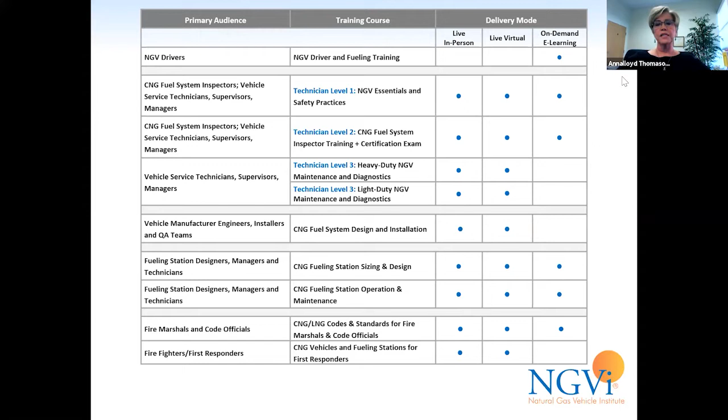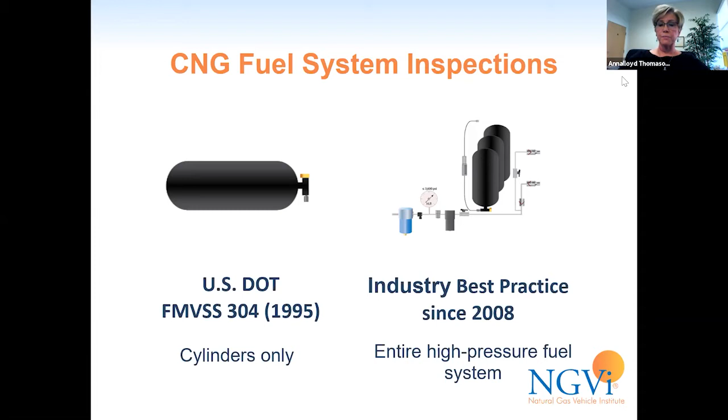In 2008, the natural gas vehicle industry recognized that just inspecting the cylinders was not adequate. And so the industry adopted a best practice of inspecting the entire high pressure CNG fuel system.

The label required by DOT's FMVSS 304 reads, 'This container should be visually inspected after a motor vehicle accident, or fire, and at least every 36 months or 36,000 miles, whichever comes first.' The word container there is interchangeable with the word cylinder. Many people call a CNG storage cylinder a tank. It's really not a tank. Tanks are for liquids, cylinders are for gases, but DOT also uses the word container interchangeably with the word cylinder.

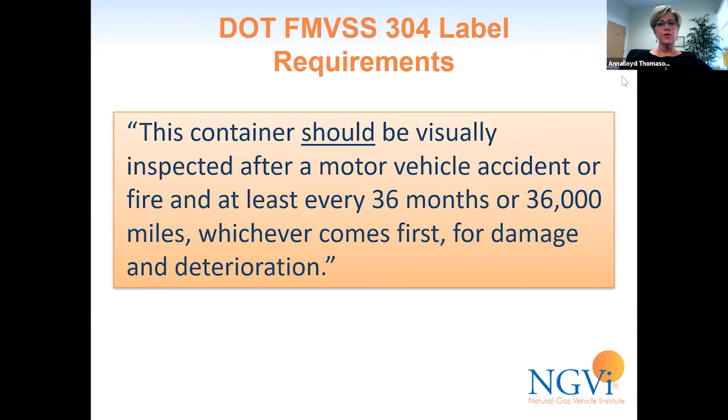And you can see, indeed, this language has to be included on every label for every CNG cylinder that is manufactured in the United States.

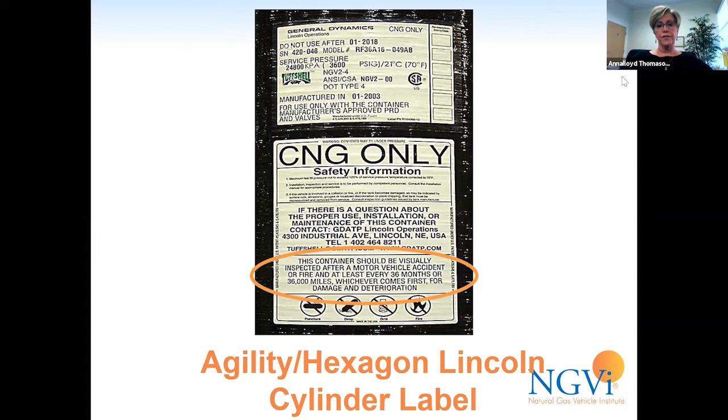So, types of inspections. There are 4 types of inspections. There is a pre-service inspection that should be performed prior to placing the vehicle into service. It is a detailed visual inspection. It's not one of the more cursory inspections, and it should include a thorough inspection of all the high pressure components, including the cylinders. And it should be performed by a certified or qualified CNG fuel system inspector.

Many of you may not know that for heavy duty fleets, there is a requirement that there be a cursory visual inspection of the CNG fuel system, at least the visible components of it, before and after each trip. Just like all the other federal inspection requirements, this should be part of that inspection, and that inspection is to be performed by the vehicle driver.

There is a general visual inspection that should be conducted anytime a vehicle is in the shop for any preventive maintenance or any service. It should be done by a trained vehicle technician. Again, it's not the detailed visual inspection that we're going to talk about. It's more about the visible components, so cylinder shields, fuel receptacles, that sort of thing.

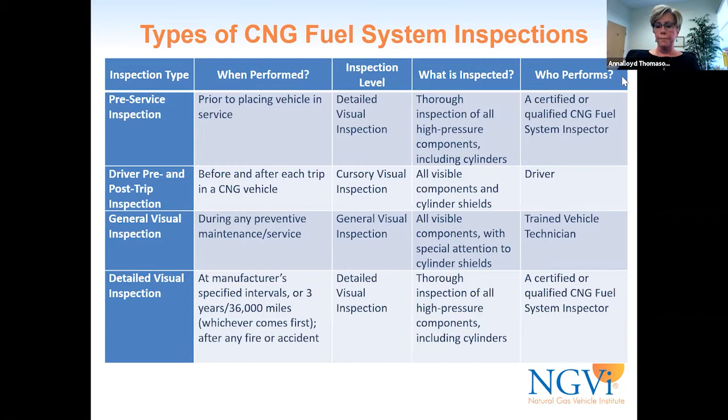And then finally, the fourth type of inspection, which is the inspection that is referred to in DOT's FMVSS 304, is a very thorough inspection of every one of the high pressure components, including the cylinders. We'll talk a little bit more about what that entails throughout this presentation.

Now, let's talk about US DOT's intervals for a moment. For heavy duty vehicles, there is a little bit of a discrepancy. So DOT's requirement says every 3 years or 36,000 miles, or after any fire or accident.

FMVSS 304, or DOT, has been petitioned by the natural gas vehicle industry to revise this standard for heavy duty vehicles, because heavy duty fuel system manufacturers believe that it is appropriate to perform an annual inspection of heavy duty fuel systems. The reason for this is for a big fleet like UPS, who runs a lot of miles on a heavy duty tractor, every 36,000 miles comes every 90 days, and that's pretty frequently.

So there has been a petition issued to DOT, actually to NHTSA, to modify that inspection interval, but there has been no ruling yet. So right now, if you're a fleet operator and you're operating buses or trucks or anything in the heavy duty realm, you have to make a choice.

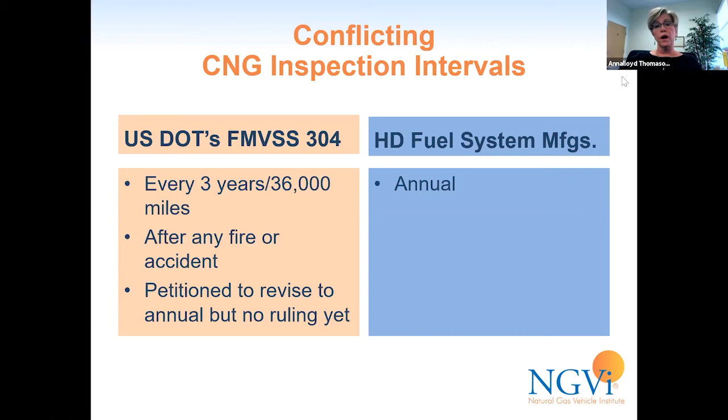And so here's our first poll question. Which CNG fuel system inspection interval would you choose, knowing what the regulation says and knowing what the manufacturers say? Which would you choose?

All right, very good. 53% of you said you would choose the manufacturer's recommendation for an annual inspection. 21% of you said you would choose FMVSS 304's requirement or recommendation. 26% of you said you might do both, and none of you said you would do neither. So that's interesting. Again, it is your choice, and everybody makes their choices based on their own information and their own fleet.

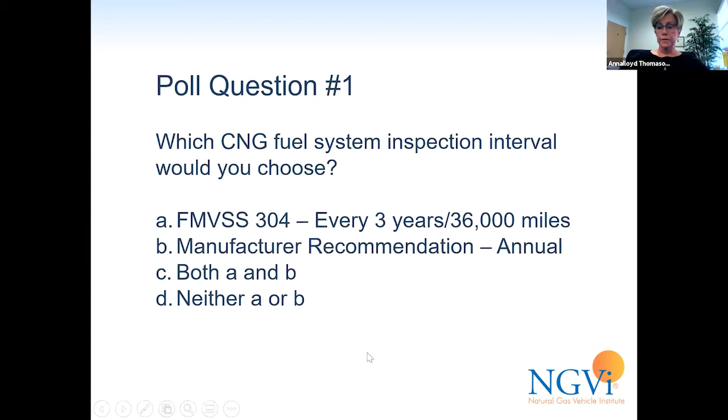All right, we will move on. Next, we're going to talk about the components that are required to be inspected. So in the detailed visual inspection, every high pressure fuel system component must be inspected.

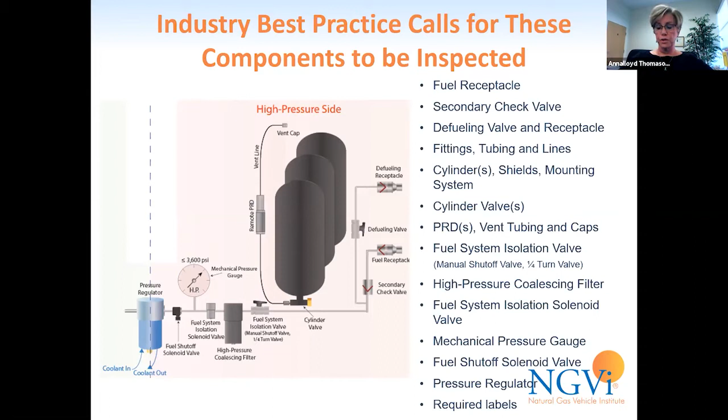So a complete, thorough, detailed visual inspection includes all of these components.

I want to talk for a little bit about the responsibilities and necessary qualifications of a CNG fuel system inspector. I'm going to make two statements that I believe with all my heart after being in this industry for 31 years. The safety of every CNG fleet, whether you're talking about the drivers, the technicians working on the vehicles inside the shop, the customers, or the general public where those vehicles will be driven, safety depends largely on the knowledge and skill of the CNG fuel system inspector.

I'm going to give you a second premise. The CNG fuel system components are manufactured and installed to extremely rigorous standards, far more rigorous than gasoline and diesel, because you're dealing with a high pressure fuel. And this means that CNG vehicles are extremely safe. But if a fleet fails to perform a fuel system inspection adequately, or does not have a properly trained fuel system inspector to detect damage or unsafe operating conditions, then a worst case scenario looks catastrophic.

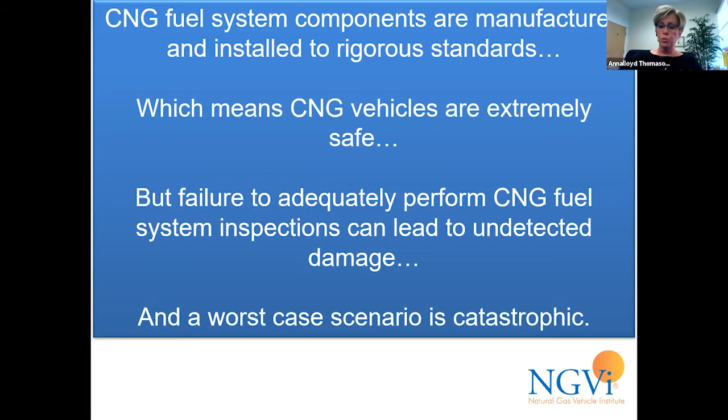And I'm going to show you what a worst case scenario could look like. This is a CNG fueling station in Bakersfield, California. And this is what happens when a cylinder ruptures in a vehicle. This is what happens to the station, and this is what happens to the tractor.

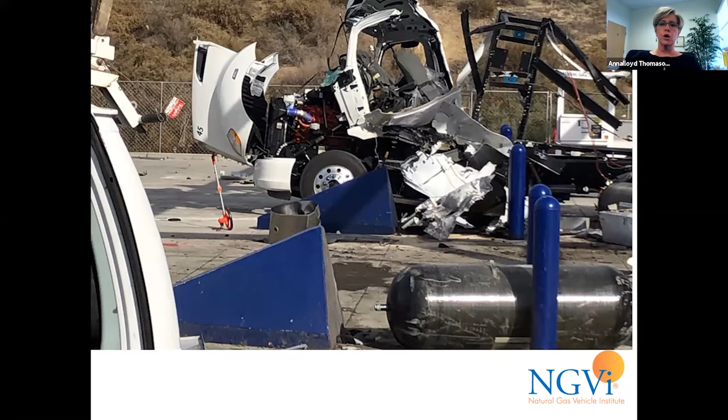Every major death-related or serious injury-related incident involving natural gas vehicles has occurred because of undetected damage. So I just can't stress how important it is to make sure that fuel system inspectors know what they're doing and are qualified to do it.

Fuel system inspectors need two things. They need knowledge, and they need very high levels of knowledge, and they need skill. First, they need the very highest measurable knowledge levels about the function and inspection requirements of every one of those components listed on the chart. Secondly, they need measurable knowledge of the requirements of the installation code, which is NFPA 52, that applies to the particular vehicles they are inspecting. In addition, they need knowledge of CGA C-6.4, the generic inspection standard, and of course the manufacturer's guidelines. These are the three documents that guide everything the fuel system inspector does.

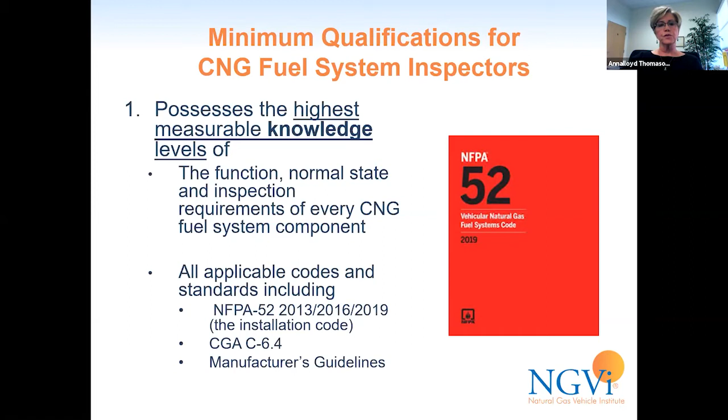In addition to that knowledge, inspectors need a very high measurable level of skills to do everything from knowing how to prepare the vehicle for inspection, to how to locate and identify all the fuel system components, because as many of you know, a PRD on one vehicle does not look like the same PRD on another vehicle. It's not installed in the same place, etc. One of the most important skills is knowing how to apply the knowledge from the codes and standards to the inspection process. And then you can read down the rest of this list for yourselves.

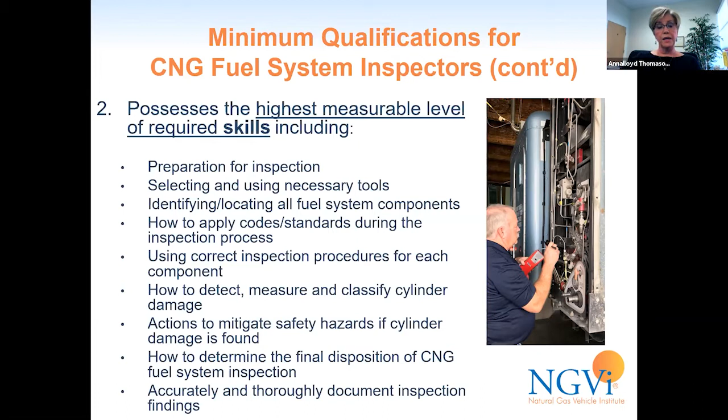Detecting and measuring and classifying cylinder damage, which is a whole special level of skill. What they need to do if they find cylinder damage to mitigate safety hazards, and then how to keep really good records so that the inspection is documented well.

We talked about NFPA 52. NFPA 52 is the primary document that an inspector is going to use to guide the inspection. It includes very specific requirements for the design and construction of the fuel system, and the permissible locations of components. You can't just put components anywhere. There are permissible locations.

What happens when cylinders expire? What happens if any components of the fuel system are installed inside a passenger compartment, including a trunk? What are the requirements to protect the cylinders? What's the positioning requirements and the ground clearances of cylinders? What are the requirements for mounting brackets? What's required for cylinders involved in fires? And a whole bunch more.

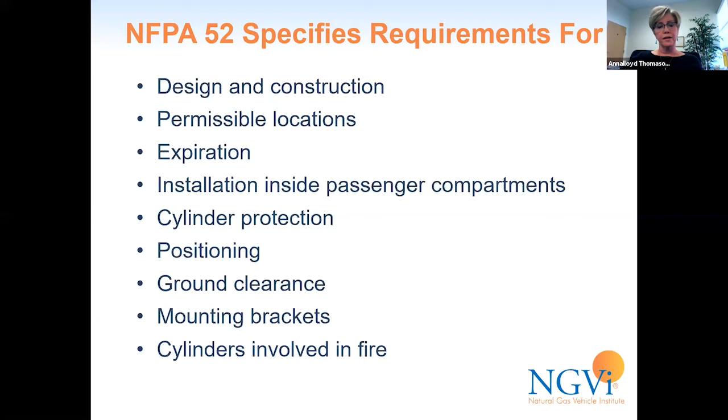Content that fuel system inspectors need to be familiar with and then be able to apply. So before we move into a look at actual fuel system inspection, answer this question for me. A CNG fuel system inspection is really just a leak check. True or false, or I don't know?

Very good, good audience, good class. 93% said false. It is not just a leak check.

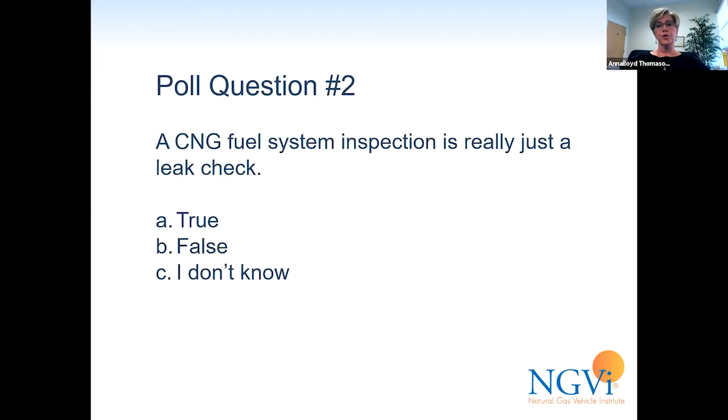So we're going to talk a little bit more about why that's true. Let's now look at the detailed visual inspection process.

There is a preparation step, and I'm giving you the big picture, high level overview. You can't take these 5 slides and be adequately prepared to do a fuel system inspection, but I'm just going to give you the big picture overview.

First of all, it's important to know the vehicle's history. Has it been in an accident? What were the results of the previous fuel system inspection, if there was one?

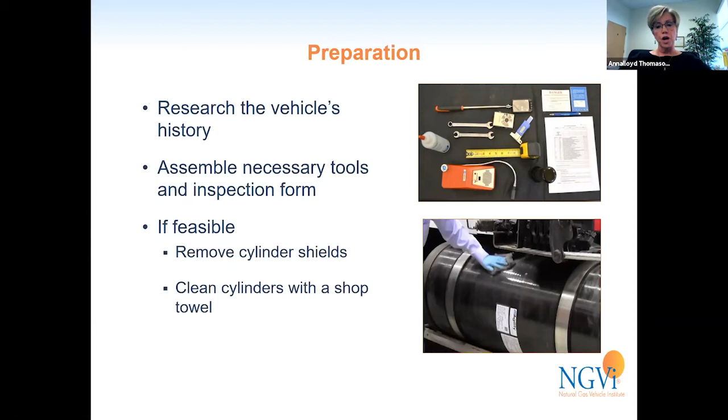You have to be able to assemble the correct tools and forms to perform the inspection, and if it's feasible, you want to be able to remove the cylinder shields, because you have to inspect visually 360 degrees around every cylinder. You also need to clean the cylinders with a shop towel so you can see cuts, scratches, gouges, etc.

Then you begin with the fuel receptacle. You're looking at the receptacles. This slide shows you an Agility fuel system, fuel management module that includes the fuel receptacles.

You're looking for any damage to the receptacles. Damage like, are they loose? Is there any evidence of Brinelling, which is caused by the continuous insertion of the fuel nozzle over the receptacle, and not doing that perhaps in a proper way.

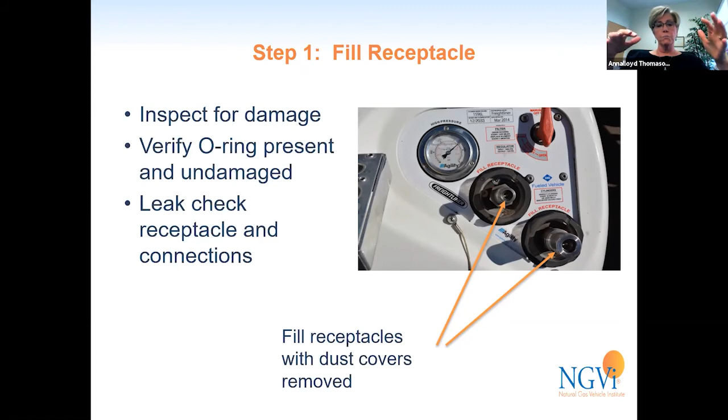Verifying that the O-ring is present and undamaged, and then there is a leak check of every component, so you want to leak check the receptacle and the connections. Next, you want to look at the secondary check valve, the defueling valve, and the receptacle.

You want to make sure that they are installed and secure, and you want to leak check the valve and the defueling valve and the receptacle and all the connections, also to make sure those are not leaking.

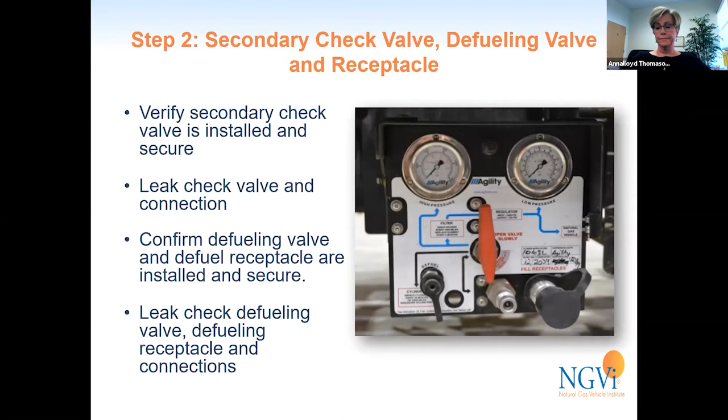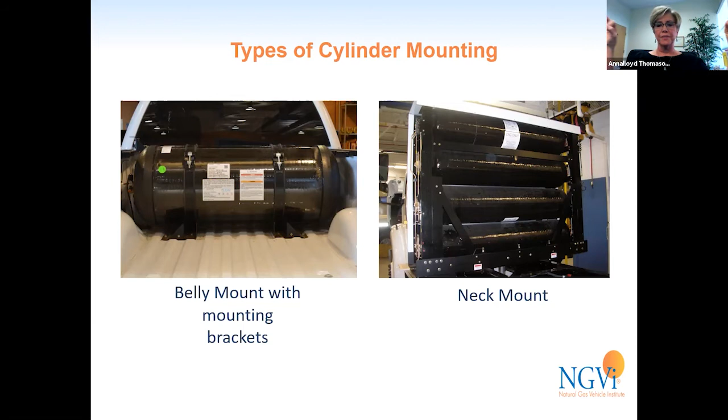The cylinders on the right are what we see in transit buses and also heavy duty tractors. They are neck mounted, so they're mounted at the neck of the cylinder and not at the belly.

So for the belly mounted cylinder, step 3 includes, and it's a very important part of the inspection, making sure that the mounting brackets and the straps are clean and in good condition, not corroded, and that they're firmly restraining the cylinder.

Cylinders move a little bit, and they're supposed to move a little bit, but there is a specification in NFPA 52 that defines how much they're supposed to be allowed to move.

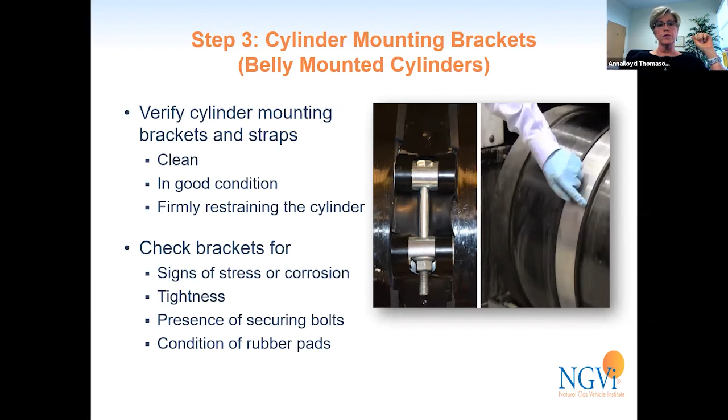You also want to check the brackets for any signs of stress or corrosion, the proper tightness, make sure the securing bolts are there, and the condition of the rubber pads, and I'll show you some rubber pad issues a little bit later. Next, you move on to the cylinders.

Now, we got 4 bullets here about inspecting the cylinders. First of all, you need to make sure that the label is affixed and intact.

As a matter of fact, if a cylinder doesn't have a label and you can't find a label for it, that cylinder has to be condemned until you can either get a label or it has to be condemned, period, because you cannot operate a vehicle with a cylinder that has no label.

You want to verify that the service pressure of the cylinder does not exceed the vehicle service pressure. This is a requirement of NFPA 52.

And then you want to verify that it has not exceeded the marked service life. There is an expiration date on all the cylinders. You can see on the label at the top, the expiration says do not use after January of 2034. So you want to make sure it's not later than January of 2034.

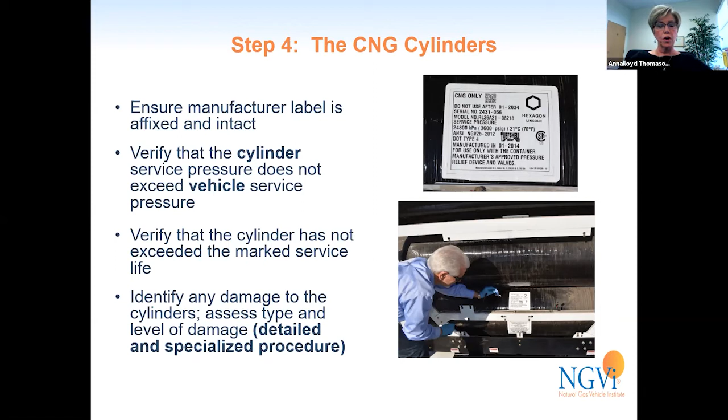And then finally, you want to be able to identify any damage to the cylinders, and you have to assess the type of damage, which we call classifying the damage, as well as the level of damage.

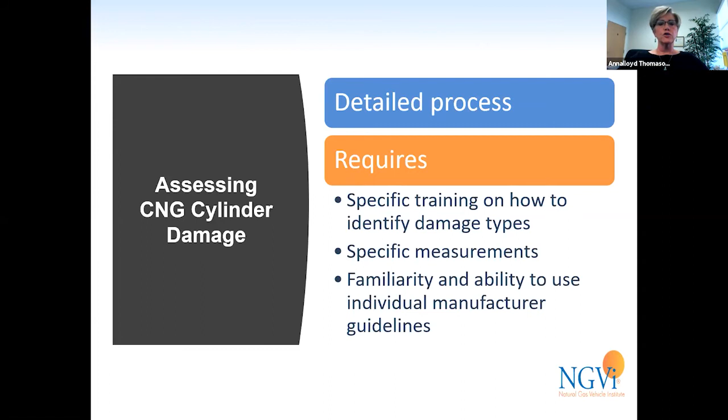Now that process of assessing cylinder damage is a very detailed process, and it requires some detailed training that we're not going to go into here today, on how to identify the types of damage, how to perform the specific measurements, and then how to use the manufacturer's guidelines in order to determine the levels of damage.

When we speak of levels of damage, there are 3 different levels, and these are uniform across the industry. Level 1 is either no damage, or an amount of damage that when measured is acceptable according to the manufacturer's guidelines, and repair is not required, so you can return that cylinder to service.

Level 2 is damage that might require repair, or it might require more evaluation, or it might require that the cylinder be condemned. It has to be further investigated, and the manufacturer's guidelines is what determines that.

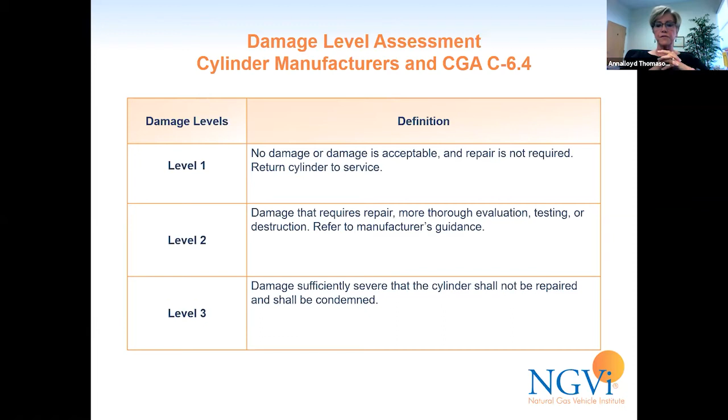And then finally, level 3 damage is damage that is severe enough that the cylinder cannot be repaired and must be condemned.

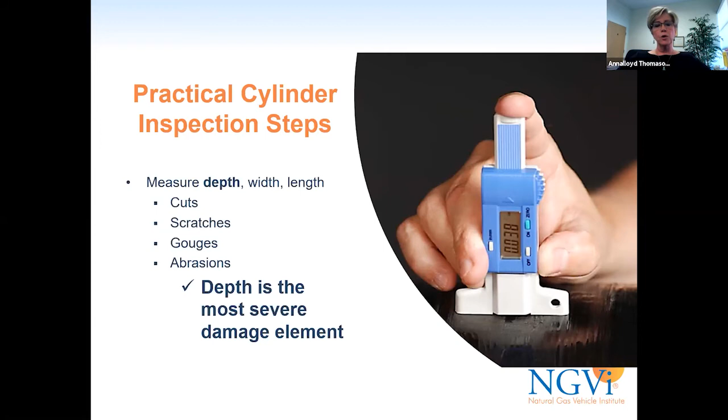So from a practical standpoint, when you're assessing cylinder damage, you're looking for any visual evidence of a cut, a scratch, a gouge, an abrasion, heat damage, chemical attack, etc. And you are measuring depth, width, and length. The most severe damage element is depth.

So level 1 damage: if you find a cut, a scratch, a gouge that meets the length requirements and is less than 10 thousandths of an inch, then you're good to go. If you range anywhere from 11 thousandths to 50 thousandths of an inch, that's level 2. For Agility cylinders, they can either be reworked in the field, or they have to be removed from the vehicle, sent back to the factory and reworked.

Any damage that is greater than 50 thousandths of an inch where there is damage has to be condemned. Okay, that's not much depth.

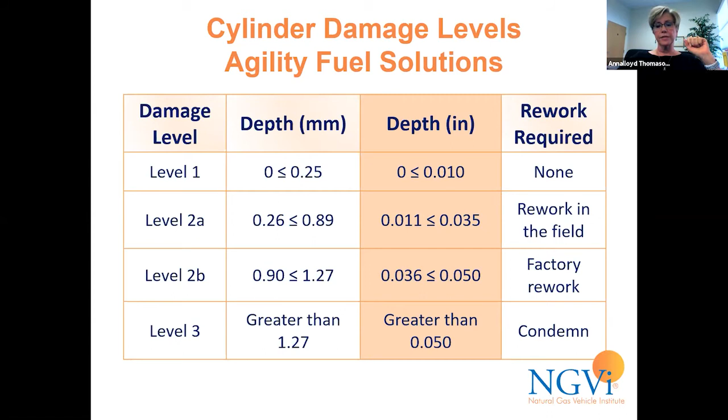The next step, we look at the pressure relief devices and the vent lines. We have to verify that there is at least one PRD attached to every cylinder, that the PRDs are in good condition, and that the eutectic material is still intact. It has not extruded for any reason, and that each PRD has a connected vent line.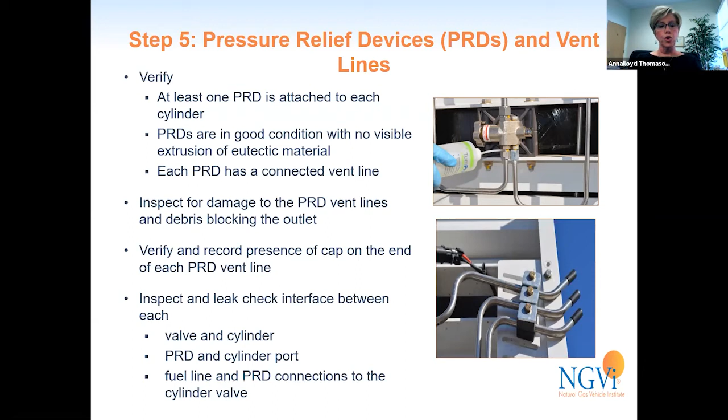No, they're not just cute. They're there, they perform several functions. They keep debris and water out of the vent lines, because if you get water in a vent line and you're operating in a really cold climate and it freezes, and then there's an incident, there's going to be a problem. But also, if there is a missing vent cap, it might mean that the PRD has activated, that something has happened to cause that PRD to activate, which would be a thermal event, and that needs to be checked out as well. And of course, you need to perform a leak check between all the interfaces of those components.

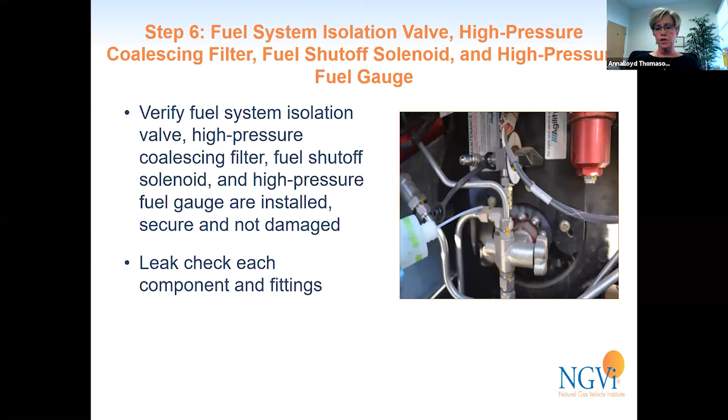The next components are the fuel system isolation valve, high pressure coalescing filter, fuel shutoff solenoid, and the high pressure fuel gauge. All of those need to be visualized, manually touched, shaken, moved, attempted to move to make sure that they're installed securely and that they're not damaged, and then leak checked as well.

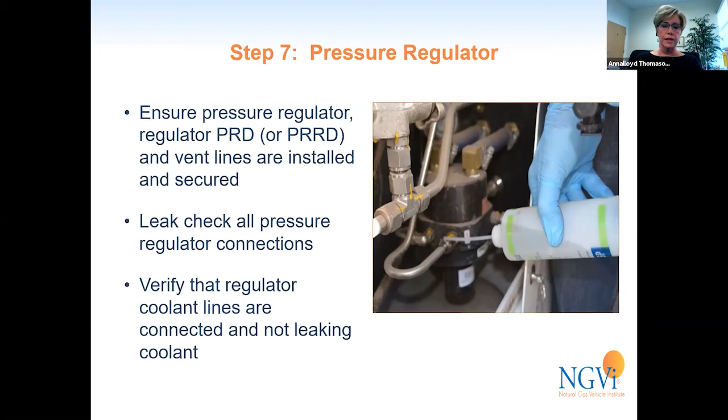And then step 7 is the pressure regulator. You have to make sure that it is installed and secured, that it has a PRD or a PRRD, which is a pressure relief, a pressure resettable relief device. Those, you have to make sure those are there and that they're secure. Leak check it, of course, and then you have to verify that the coolant lines are connected and not leaking coolant.

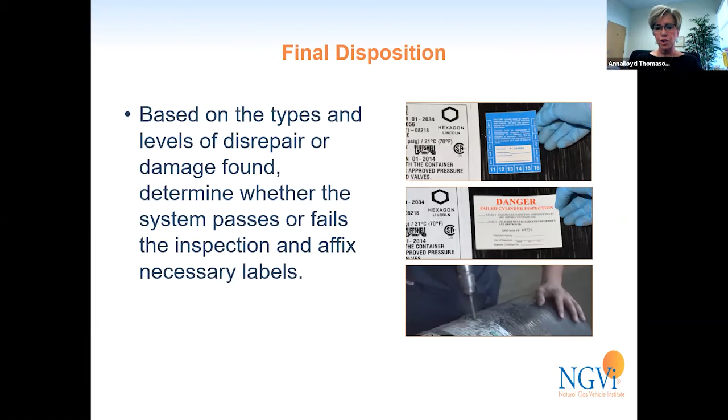And then finally, based on all the findings of the inspection, you need to identify and determine whether, based on those levels of any disrepair or damage that is found, does this fuel system pass inspection or does it fail inspection?

All right, I'm going to show you some photos, but before I do, here's a question. How frequently do you think CNG fuel system inspectors find safety issues that need to be resolved?

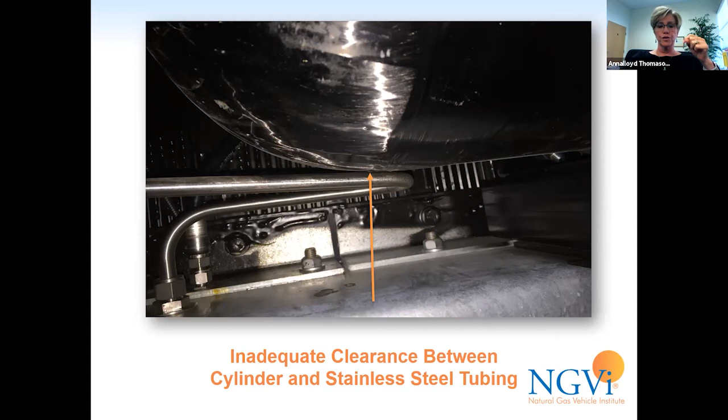So often we see things like this - there is inadequate clearance here. NFPA 52 defines minimum clearance between a cylinder and any other component, because as that vehicle is going down the road, any vibration that causes a stainless steel fuel line to rub on that cylinder is going to create a problem. So we see inadequate clearances.

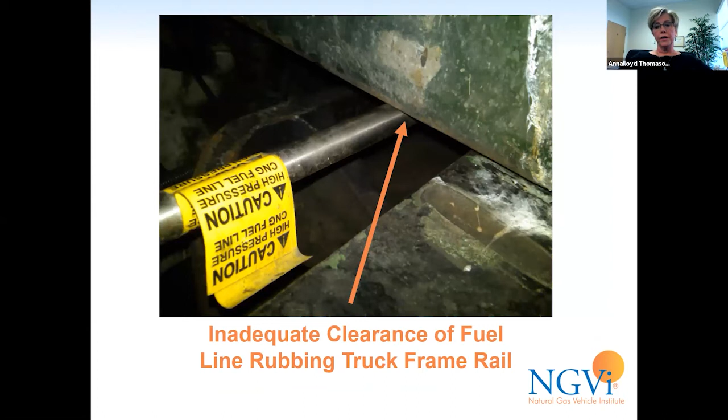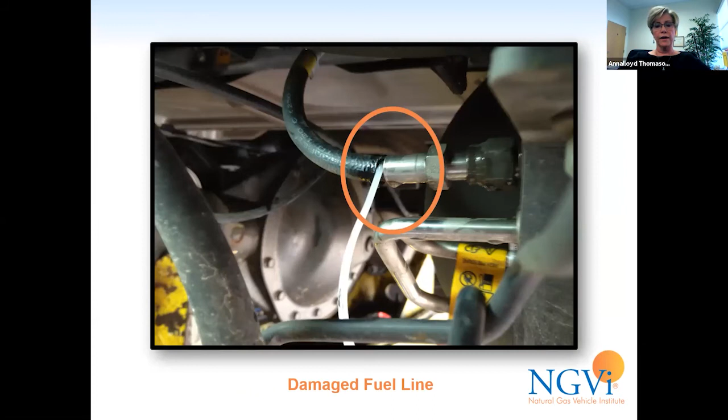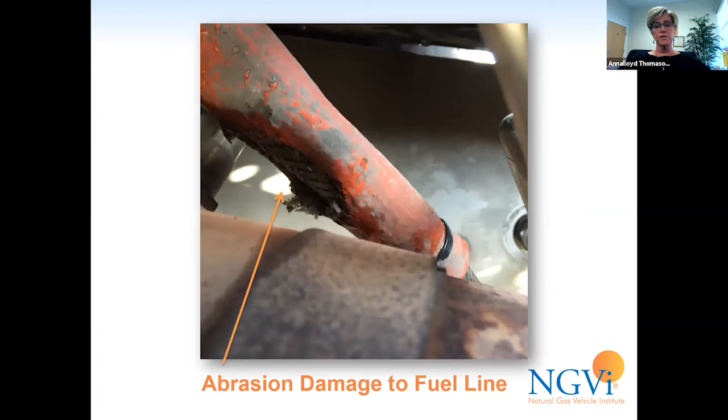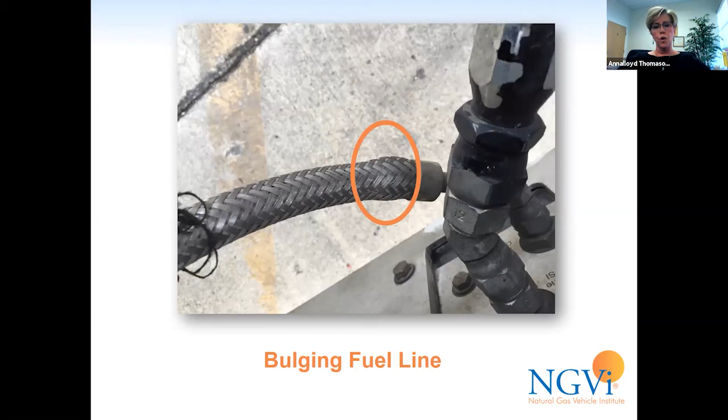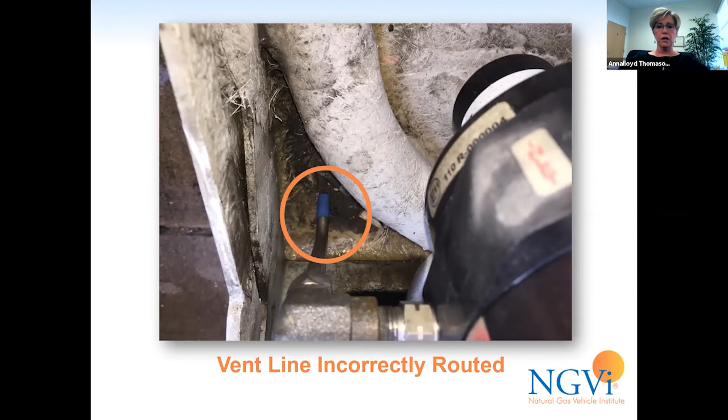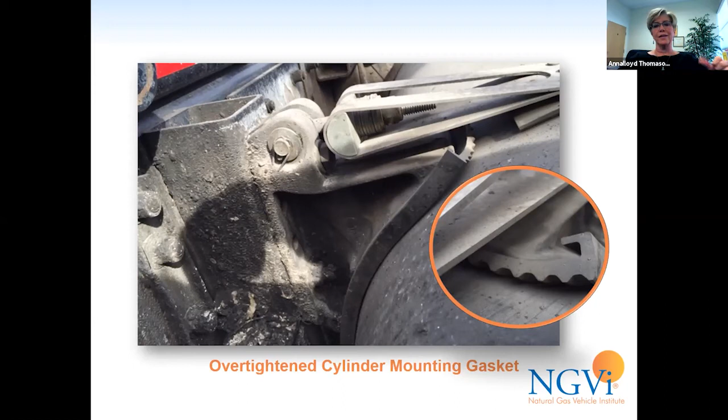Corrosion is relatively common that we see. This is an example of an over-tightened cylinder mounting gasket. The big picture is a broader view, and the circle gives you a cutout - you can see that the gasket is rising up, it's not laying flush on the surface of the cylinder. That means the gasket and the connections have been over-tightened.

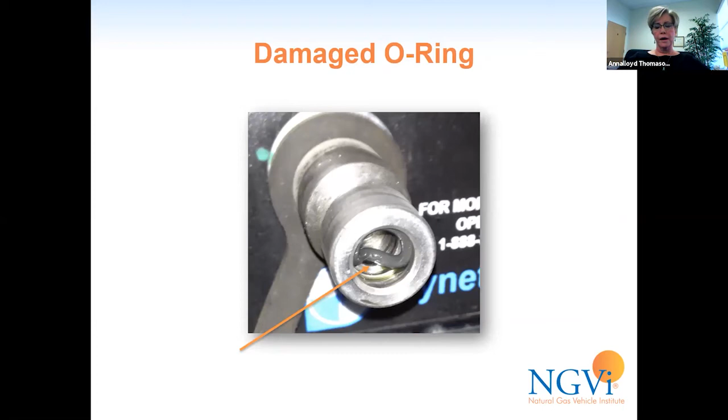This is very common - damaged O-ring inside the fuel receptacle. If the O-ring is damaged, that creates an unsafe fueling condition. That's maybe a 59-cent part, I'm making that up, but those are very easy to replace. A lot of drivers just carry those with them.

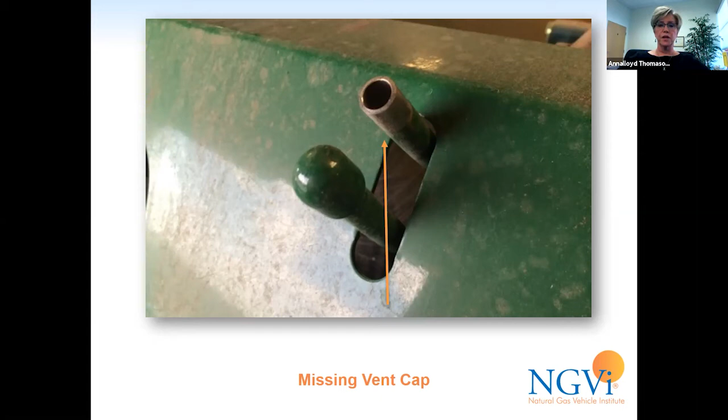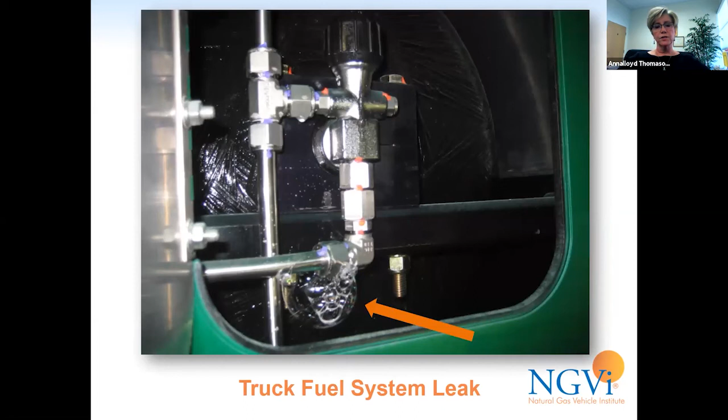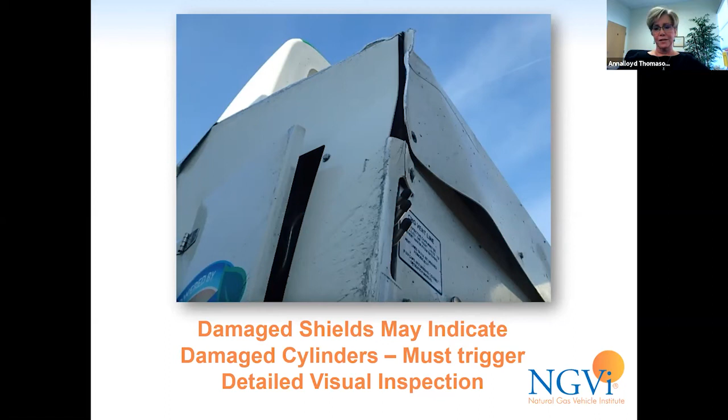Damaged shields - this is a very critical thing. If you are operating a truck or a transit bus or a refuse truck or whatever that has shields, large areas of shields, if there is damage to the shields, this may or may not mean the cylinders have been damaged. A damaged shield should always, always, always trigger a detailed visual inspection. This vehicle should not be driven until the cylinders and the rest of the fuel system have been inspected to make sure they're working properly and in proper condition.

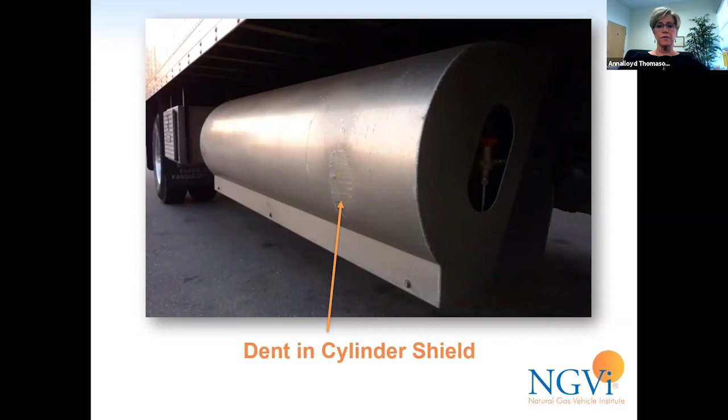This is a saddle mount cylinder that has a dent in it. That definitely would not pass inspection without checking out the rest of the fuel system and the cylinder inside there. And here's another example of cylinder shield damage.

Let's talk a little bit about some common types of cylinder damage. This is a cut in a type 3 cylinder, so that's what a cut looks like. That's why you need the cylinders to be clean - not spotless, but clean enough to be able to visualize 360 degrees around every cylinder.

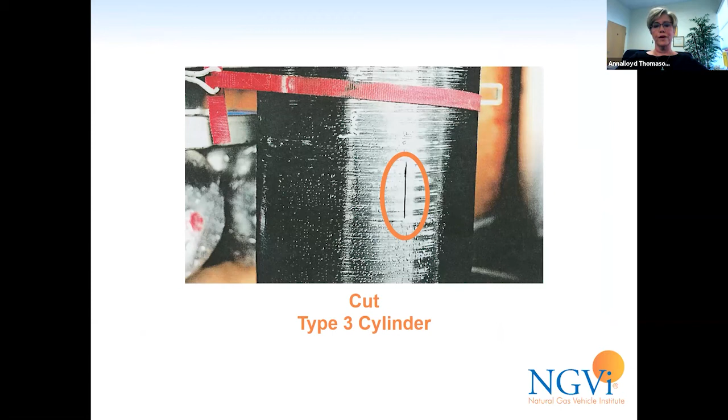This is more common than I would love to see in our industry. This is an image of a cylinder - the black surface area is the cylinder, and the green surface area is the cylinder shield. This is a refuse truck.

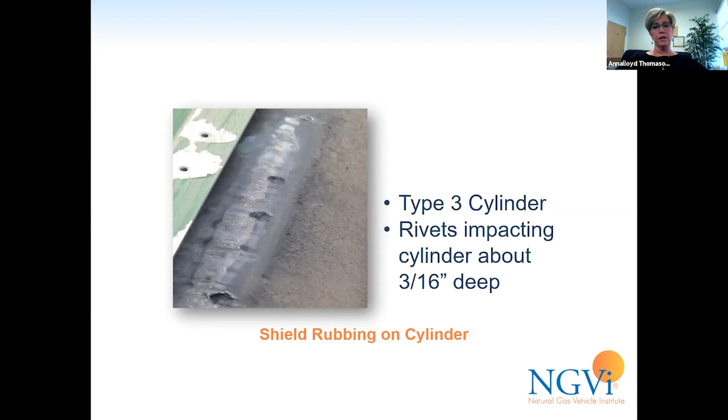There was not proper clearance between the rivets and the cylinder shield and the cylinder, and so the damage there, the depth of those gouges is about 3/16 of an inch, way, way above level 3 damage. This is a 1-year-old roll-off truck for one of our Republic Services clients, a truck that's been in service just a year, and this is level 3 damage that we found to that cylinder due to the bolts.

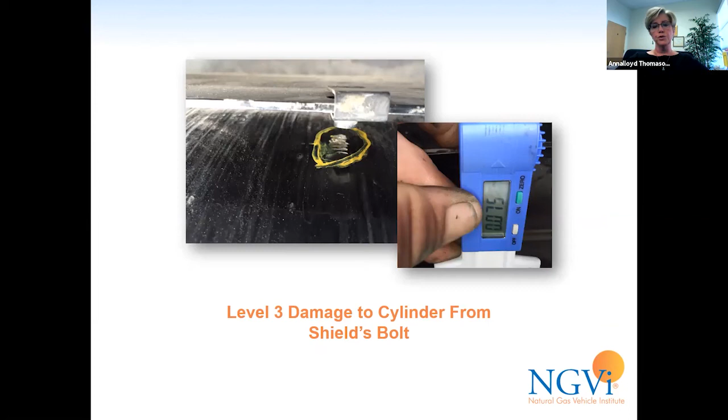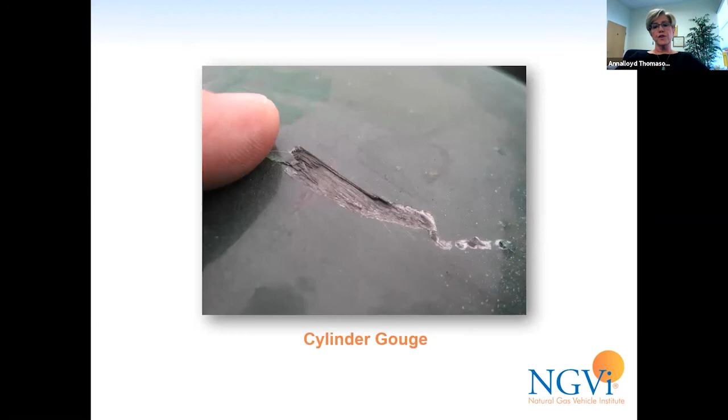Again, that's a gouge that's been caused by the bolt. This is also a gouge, also caused by a cylinder bolt. Here's a different type of gouge. Pretty obvious that that's damage.

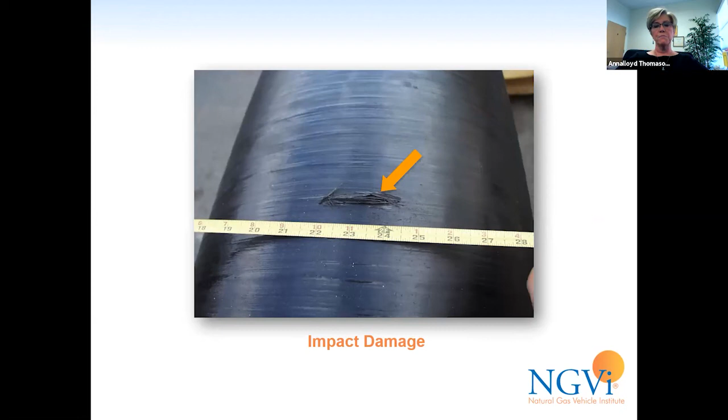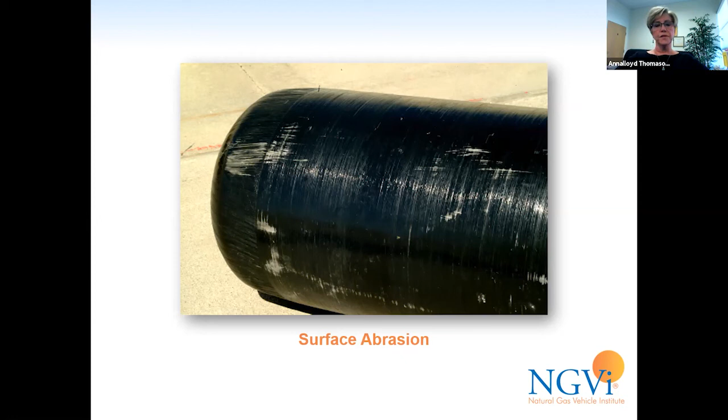This is impact damage, so something hit that cylinder that caused that level of impact damage. This is abrasion. Oftentimes people don't think abrasion is a big deal, but if it's deep enough, it's a big deal. And this is what surface abrasion might look like.

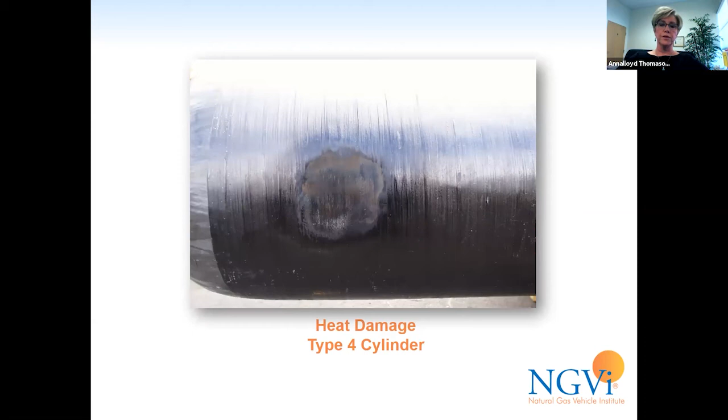This is heat damage. So any type of heat damage, this is what it generally looks like on a type 3 or a type 4 cylinder. Any type of heat damage automatically requires that the cylinder be condemned. It is a class 3, level 3 damage, and it automatically requires that the cylinder is condemned and either removed from the fuel system or at least isolated from the fuel system.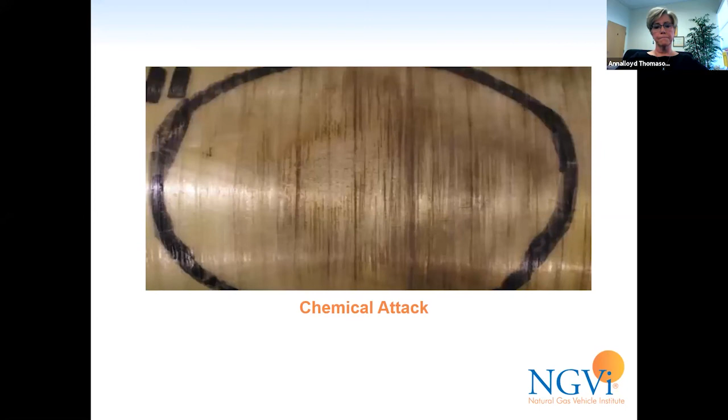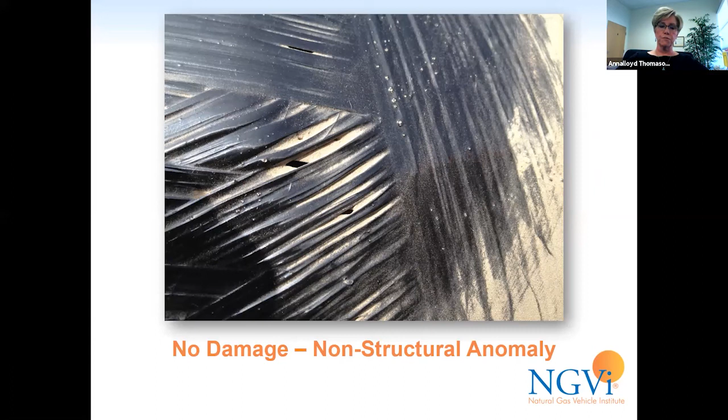I should have given us a poll question for this one. So this is not damage, believe it or not. This is what is considered to be a non-structural anomaly, and it is an acceptable level of variation in the outer winding of a cylinder. So I think if you were an average person and you looked at that, you'd go, wow, there's something wrong with that cylinder, but there is not. That is a non-structural anomaly.

So just to recap, for fuel system inspectors, I can't emphasize enough the value, the importance, the criticalness of training, and also the responsibility that a fuel system inspector carries. Not that the fuel system inspector doesn't have other resources, because of course you do.

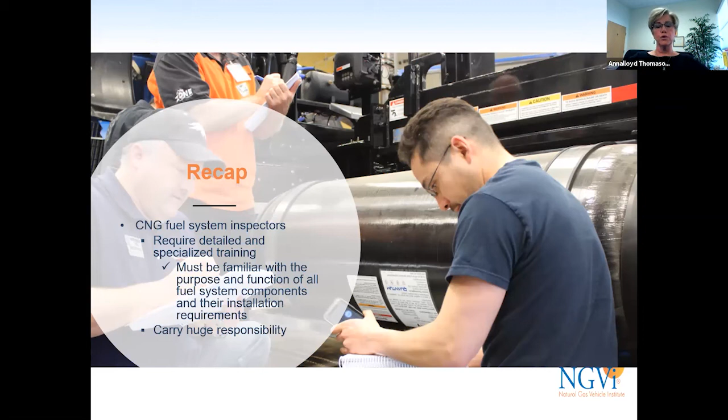You can always call the fuel system manufacturer, the cylinder manufacturer. You can get other resources, but you need to really be able to do your job and do your job well. Sabrina, any questions you want to throw at me?

There are no questions. All right.

I'd like to talk just real briefly then about our training and certification for CNG fuel system inspectors. We are probably most well known for our CNG fuel system inspector training course. We used to call it a 2-day, now we call it a 12 hour, if it's virtual, training class, and it has 2 overall objectives: to provide both the necessary knowledge and the skills that prepare the technician to perform a CNG fuel system inspection, a thorough one, an adequate one, that complies with all the codes and standards and best practices. And it also will help prepare a technician to sit for the CNG fuel system inspector certification exam.

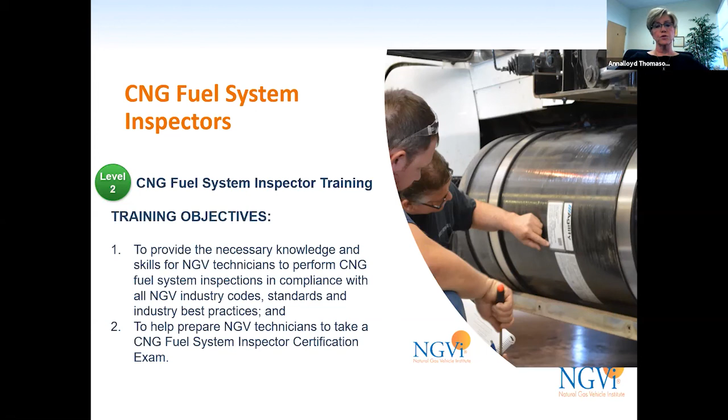This is a course outline of our training course. It starts out with an overview. The first 4 modules are kind of an overview of codes and standards, just the basic fundamentals of what they are and what they do, because we talk about the details of each code as it applies to each component. So the blue highlighted subjects are overview material, talking about the codes and standards components, and then we move right into a separate module for each component. Each one of those components that was illustrated on the drawing I showed you earlier is covered here.

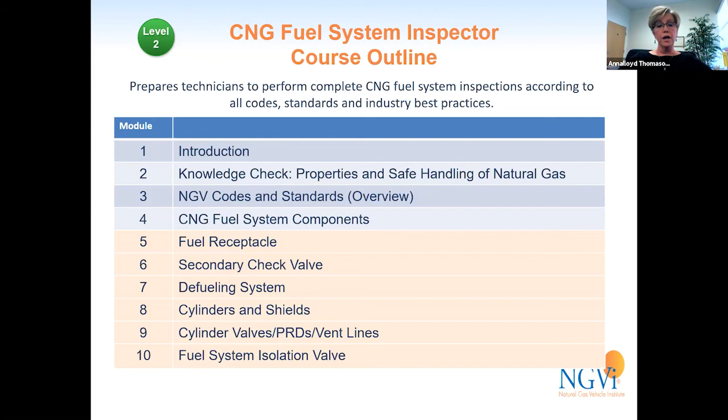There's a module dedicated to: here's what it looks like, here's where it should be installed, here's its most common failure mode, here's how you recognize damage, here's how you leak check it, here's how to determine whether it passes inspection or not. And that applies from the fuel receptacle all the way down to labeling, because labeling is also a requirement. NFPA 52 has very specific labeling requirements, not just for cylinders, but for other components and other areas of the vehicle. So our training covers off on all the details about how to inspect for and make sure that each of those components is in compliance and good repair and not leaking.

And then the last 3 modules talk specifically about how to determine the final disposition of a CNG fuel system. How do you dispose of it? What is the proper methodology for disposing of a cylinder? If you have a level 3 damaged cylinder that needs to be removed from a vehicle, how do you dispose of it? There's a whole procedure for that. If you don't know what you're doing, there can be serious injury.

You have to make sure the cylinder is depressurized, and you have to be able to confirm that it's depressurized. Then you need to remove the valve and the PRD, and drill holes in it before it's disposed of so it can't be used again. Training also covers defueling, because anytime you're inspecting a fuel system, if you find level 2 or level 3 damage, the very first thing you need to do is defuel that cylinder, so it's important that the fuel system inspector know how to do that.

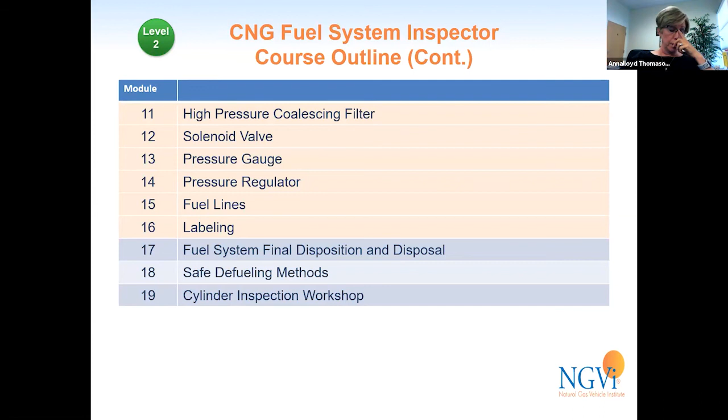And then an entire hands-on workshop where learners get to go out on the vehicles and actually conduct activities. Now with our virtual training, let me back up here for a minute. We have created activities that mimic the live activities that we normally would do in our live training. So we handle it that way.

I want to talk a little bit about certification for a moment. We talked earlier about how fuel system inspectors need measurable levels of knowledge and measurable levels of skill. The only way you can properly do that is to test to it. So we created an assessment, a test of both knowledge and the application of skills, not based on random information, not based on our training content, but based on our job study.

Our certification program was created totally independently of training. It's administered totally independently of our training, and it's overseen by an independent advisory board. The members of that advisory board include cylinder manufacturers, fuel system manufacturers, vehicle manufacturers, and end users.

Our certification is valid for 5 years, and what it consists of is a 60-question exam that you must score 80% on to pass. If you score at least 80%, then you are a certified NGVi certified CNG fuel system inspector. We give each test taker 2 opportunities to pass.

Some people just don't love tests, get a little nervous before a test, so we have 2 opportunities to pass, and we offer that certification exam live or online. So if we're delivering training for you live, you can sit for the inspector certification exam right there, and if not, it can be taken online.